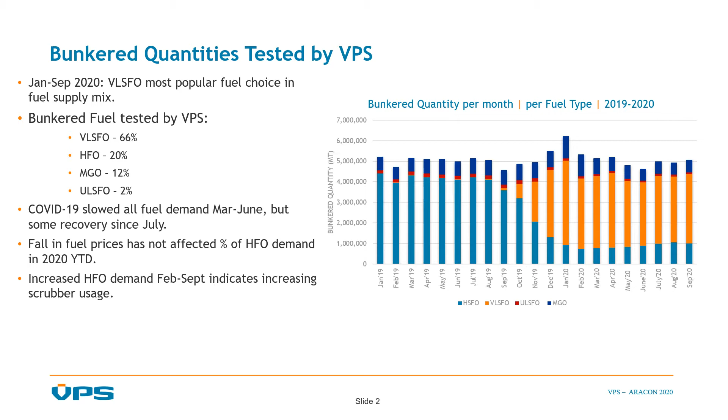Whilst the year started very strongly for bunkering volumes, the COVID-19 pandemic played a significant role in decreasing bunker fuel demand between the start of March and the end of June, but we have seen a slow recovery since July. The fall in crude oil pricing and subsequent marine fuel price drop did not see a rise in demand for MGO or a fall in demand for HSFO, as one may have expected.

If we use VPS bunker alerts, which are reports of short-term fuel quality issues in specific ports for specific test parameters, as an indicator of overall fuel quality, VPS issued 37 alerts between January and September 2020, versus only 18 over the same time period in 2019. However, these are not for one single fuel type, but MGO, HFO, and VLSFO have all required an increased number of bunker alerts this year.

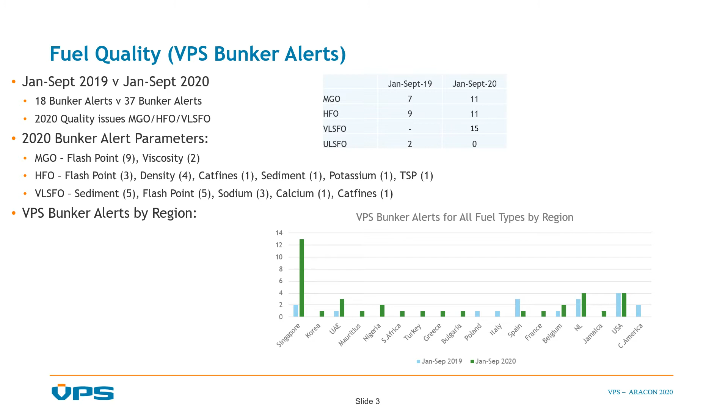For MGO, the most common quality concern parameter is flash point. For HSFO, the most common parameters requiring bunker alerts are flash point and density, whilst for VLSFOs, as one would expect, the bunker alerts have been predominantly related to sediment and stability issues. From a regional perspective, we've seen an increase in bunker alerts for Singapore and a much wider geographical spread of bunker alerts in general this year.

Due to the current COVID-19 pandemic, the levels of both land-based and aerospace transportation have significantly reduced, and as a result, automotive and aviation fuels have been in surplus and become relatively cheaper. It's possible this has encouraged the potential increase in the use of automotive gas oil and aviation fuels, which have a significantly lower flash point than marine fuels, as blending components. Such a practice would lower the flash point of marine fuels.

From 37 bunker alerts VPS issued between January and September 2020, 17 related to flash point, with 9 for MGO, 5 for VLSFO, and 3 for HSFO. Over the same time period of 2019, VPS issued only 8 flash point related bunker alerts, and all of those were for MGO.

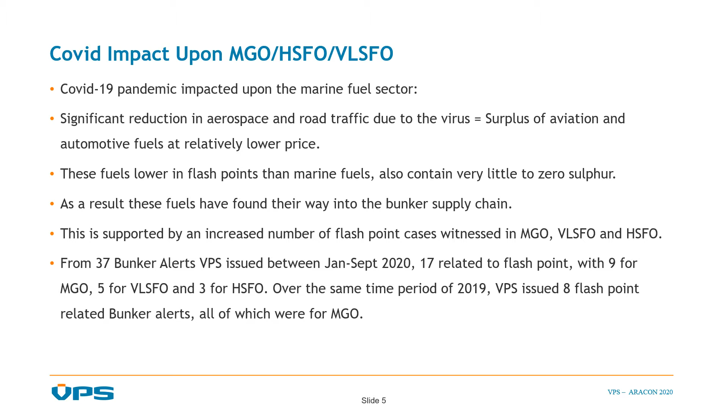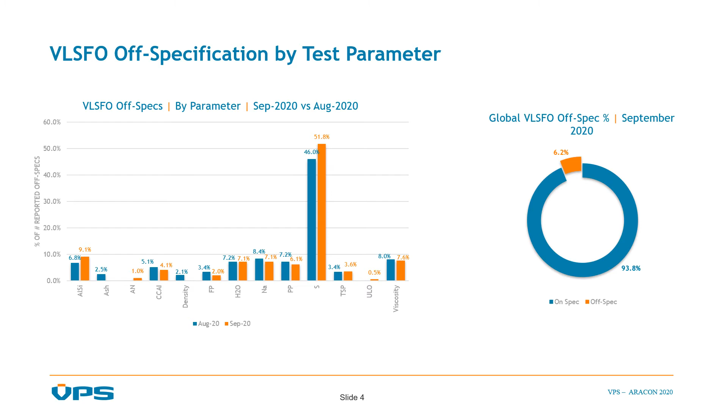If we now consider VLSFOs as the most currently purchased and used marine fuel type in 2020, we see that 6.2% of these fuels exceed at least one test parameter specification, with sulfur accounting for 52% of those off-specification incidents in September of this year. For a few months now, Europe has been the region showing the highest number of VLSFO off-specs, with 15% of all European samples tested exceeding at least one test parameter specification. North America is the next worst in terms of off-specs, with almost 1 in 10.

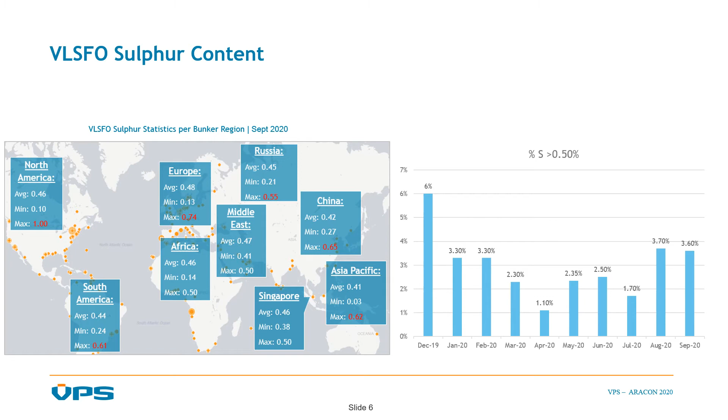For all the main bunkering regions, VPS are now seeing the average sulfur content at compliant levels, but on occasion, in every region, we are seeing some significant maximum spikes between 0.55% to 1% sulfur. In September, 3.6% of all samples tested exceeded the 0.50 sulfur level. In terms of the 95% confidence limits, 2.8% of samples were between 0.51 and 0.53% sulfur, with only 0.8% of samples tested exceeding the upper limit of 0.53%. Sulfur off-specs have varied across the year from 6% in December down to 1.1% in April, rising again thereafter to 3.6% in September.

Since VPS first began testing VLSFOs, their stability has always been an area requiring additional concentration.

The fact that many VLSFOs are highly blended fuels with a varying mix of aromatic and paraffinic components leads to a greater potential for the fuel to destabilize, forming asphaltenic sludges, waxes, or both. Greater attention is required regarding the fuel's storage conditions, transfer and burning following receipt on board, in order to avoid operational problems which can occur with these blended products.

TSP accounted for 3.6% of the VLSFO off specifications in September 2020, but the average TSP values across the world's bunkering regions are on specification with values between 0.01 to 0.02%. However, VPS have witnessed many stability issues without the TSP being off specification. Where VLSFOs have been tested as stable when bunkered, some within only a few weeks have become unstable, indicating their storage lifespan is much shorter than the more traditional marine fuels. So the average shelf life of a VLSFO is less than 3 months, compared to an HSFO at 6 months and an MGO at 12 months.

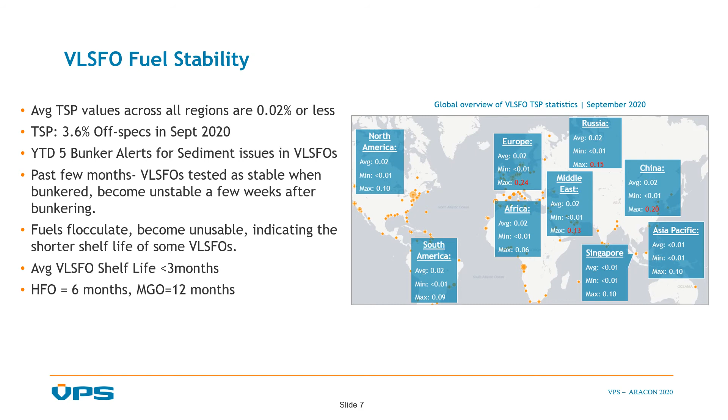Another concern with regard to VLSFO stability are the cold flow properties. Due to higher paraffinic content within VLSFOs, there is a far greater potential for the fuel to precipitate wax. Maintaining the fuel above the wax appearance temperature, or WAT, will always ensure the fuel will flow freely. However, the latest data has shown that the average WAT is 21 degrees centigrade greater than the average pour point. Therefore, traditional industry advice of storing fuels at 10 degrees centigrade above the fuel's pour point is no longer a trusted guideline in many cases, as the fuel may produce wax at a much higher temperature than 10 degrees above pour point. The majority of VLSFOs are exhibiting pour points of less than 30 degrees centigrade, yet more than 67% of WAT values are greater than 30 degrees centigrade.

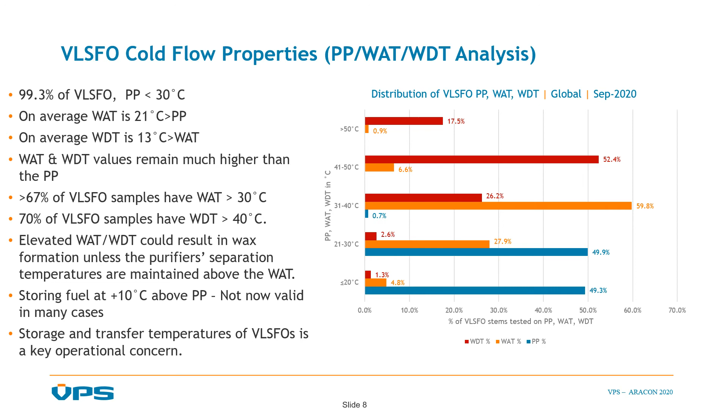In addition, if a fuel has precipitated wax, the temperature required to then dissolve that wax, the wax disappearance temperature, is currently on average 13 degrees higher than the average WAT, with more than 70% of VLSFOs having a wax disappearance temperature of greater than 40 degrees. Therefore, wax appearance temperature, wax disappearance temperature, and pour point are all key operational parameters in avoiding the waxing of VLSFOs.

From the outset, VLSFOs were exhibiting higher cat fine levels than HFOs. In January, 22% of samples showed a cat fine level of greater than 40 ppm. However, more recently, VLSFO cat fine levels have reduced quite significantly across all major bunker regions, and we now see only 11% of samples with cat fines greater than 40 ppm, and only 0.5% of samples tested are greater than the 60 ppm limit.

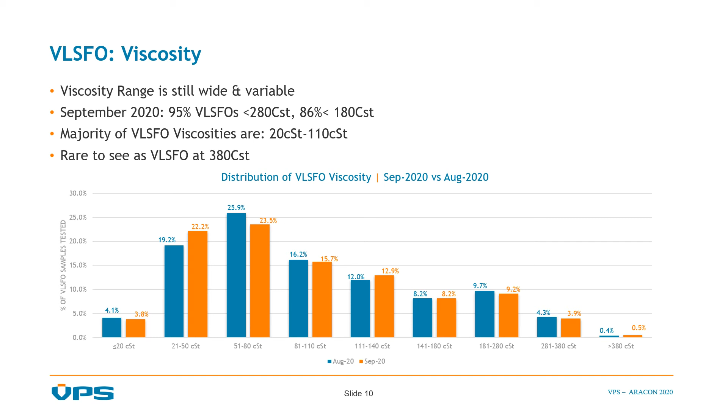One of the initial issues witnessed with VLSFOs was the extremely wide range of viscosities exhibited by these fuels. This is still the situation, with a viscosity range going from 2 centistokes to 590 centistokes in September. Having said this, the majority of VLSFOs fall between 20 centistokes and 110 centistokes. This is still a fair way off the 380 centistokes which shipping was used to pre-IMO 2020. Currently, 95% of VLSFOs have a viscosity of less than 280 centistokes, and 86% of the viscosities are less than 180 centistokes. Of course, viscosity is such a key parameter with respect to fuel storage, transfer, handling, and fuel injection into the engine, that it is vital viscosity is known in order to ensure efficient vessel operation.

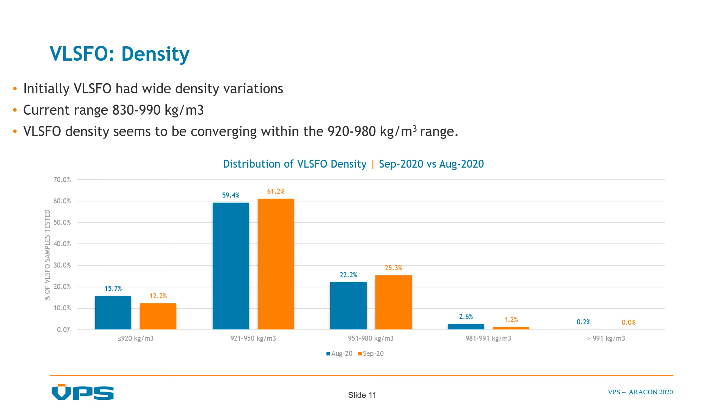Like viscosity, the densities of VLSFOs were initially very wide-ranging. To a point, this is still the situation, with the current range falling between 830 to 990 kilograms per meter cubed. However, the majority of samples tested fall between 920 to 980 kilograms per meter cubed. This more consistent range certainly helps with respect to purifier operations on board.

During the first quarter of 2020, VPS identified significant engine damage arising in more than 40 vessels. This engine damage has been in the form of hard, abrasive deposits on piston crowns, excessive cylinder liner wear, and broken piston rings. As a consequence of these damages, VPS undertook a comprehensive investigation. The investigation identified that the reserve base number in the cylinder oil was not being utilized to neutralize the acids formed during the fuel combustion process, as is its purpose. This resulted in calcium compounds being deposited on the piston crown, which became hard and abrasive, causing the liner wear, liner scuffing, and piston ring breakage, resulting in serious operational issues.

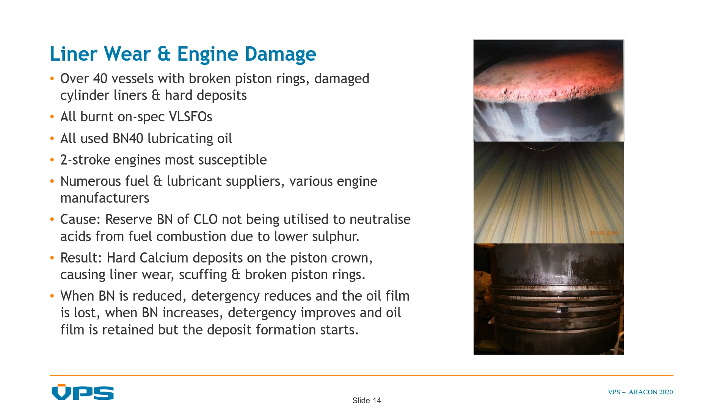It is worth noting, in general, when the base number is reduced, the lubricating oil detergency reduces and the oil film is lost. But when base number increases, the detergency improves and the oil film is retained, but then calcium deposit formation may start. A number of preventative actions may be taken by ship operators using VLSFOs to protect the engines and avoid operational issues arising from excessive liner wear. Primarily, undertaking cylinder scrape-down analysis will identify if an adequate lubricating oil formulation is being used, which may be further confirmed by a sweep test. In addition to this, the ship operator should closely monitor engine operation during an introduction of new VLSFO fuel and changeover of VLSFO to MGO or MGO to VLSFO when entering or leaving an ECA.

So I think you will agree 2020 has had numerous challenges, not only in terms of pandemic, human health and business, but also the challenges that the new VLSFO fuels have raised and caused throughout the course of the year.